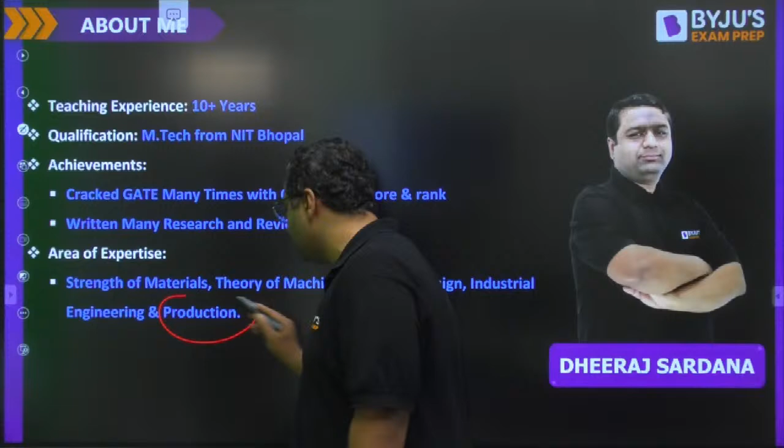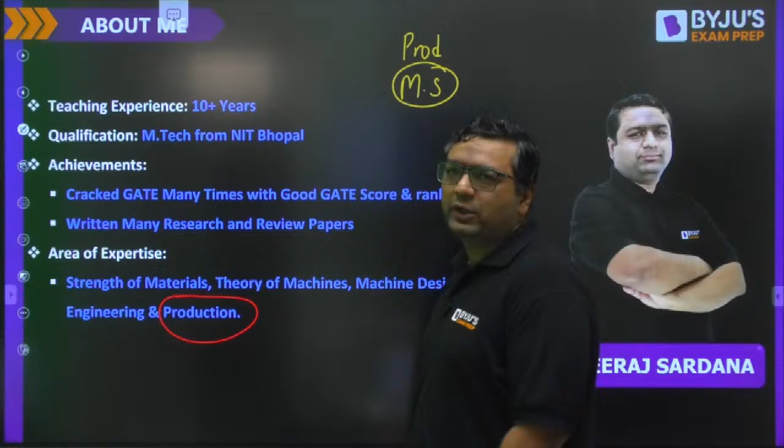So, guys, this is some detail about me, and today's subject is related to production. I already told you that whenever you see the production part in ISRO, major questions are coming from material science, okay? And in production, you will find one question from all the areas. So, we are going to continue from this.

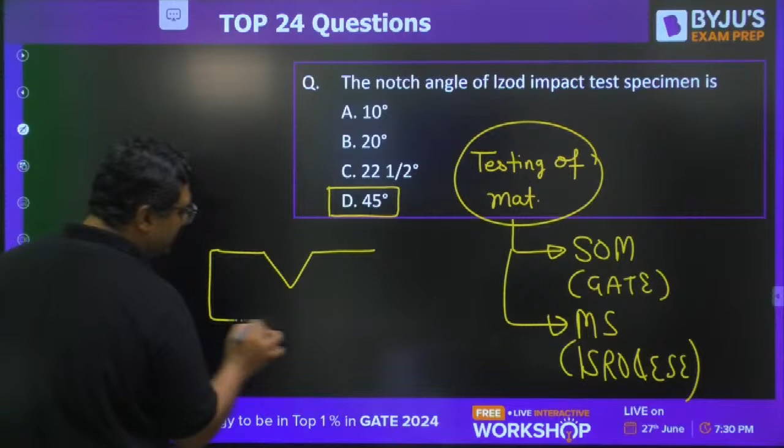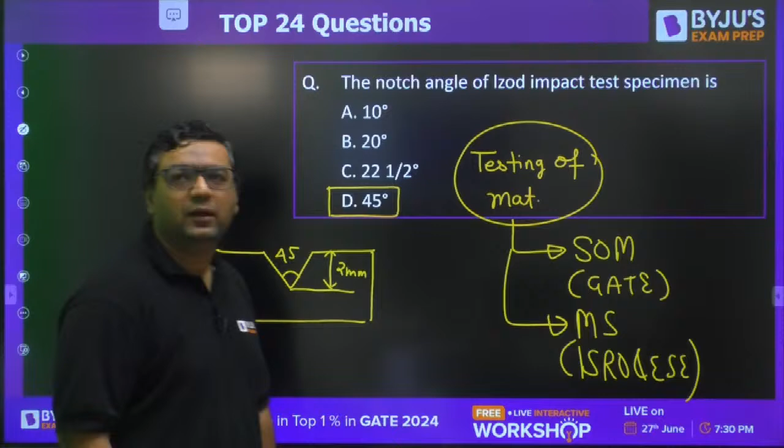Pagelward is saying the answer to be B. So I would like to say, dear, the answer is wrong. Actually, 45 degrees is the correct answer. When you are talking about the Izod impact test, then you are using this kind of specimen. This angle is 45 degree and this is 2 mm. Okay, so this is the dimension of that. So answer would be, yes, Shashank, hi dear. So answer will be 45 degree. Very good, guys. Wonderful. Moving to the next question, guys.

So dear, I would like to say, machinability does not depend upon the tool life. What is machinability actually? It is the ability to get machined. Like if we have a component and if it is easy to machine the component, then we will be calling that, yes, it is a good machinable component. Its machinability is very good. So my dear, for that, if we have a hard workpiece, it will be difficult to machine. Soft workpiece would be easier to machine. So hardness is which property? It is a mechanical property. So obviously it depends on the mechanical properties.

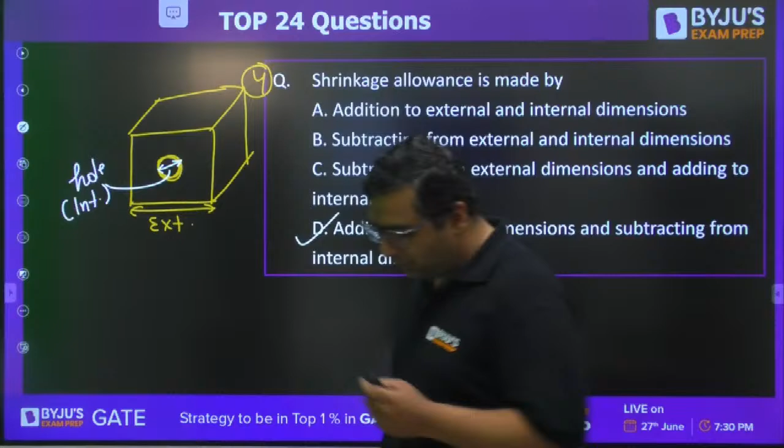Okay. So Jitin is saying D, Fajal D, Vinod D, Rajesh D. So guys, the answer for this is yes, D. Because my dear, although this type of numerical has not been asked in GATE till now, as you know, shrinkage is going to happen. So if this dimension is 100 mm, and it is given that 1 mm per 100 mm is the shrinkage allowance, then for pattern size this will be taken as 101 mm. So here we add, but in internal dimension, we are going to subtract it.

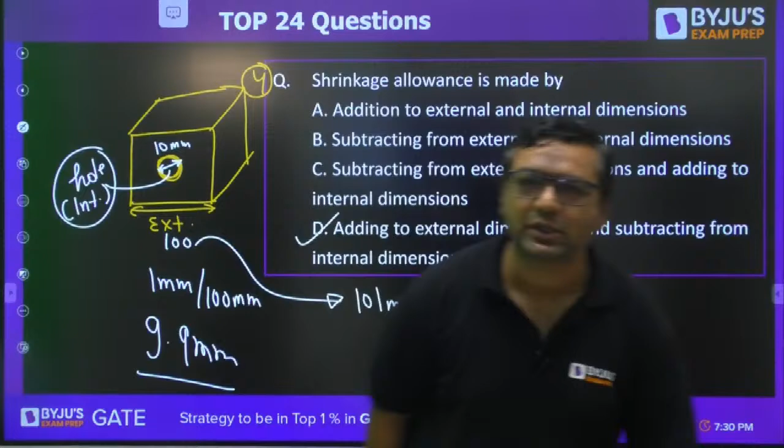So when we subtract it, it means if that hole is of 10 mm, then you would be taking it as 9.9 mm. Is it clear? 1 mm from 100 mm, so 0.1 mm from 10 mm. So here we will be subtracting it. D is the right answer for this. Very good. Moving further to question number 5, my dear.

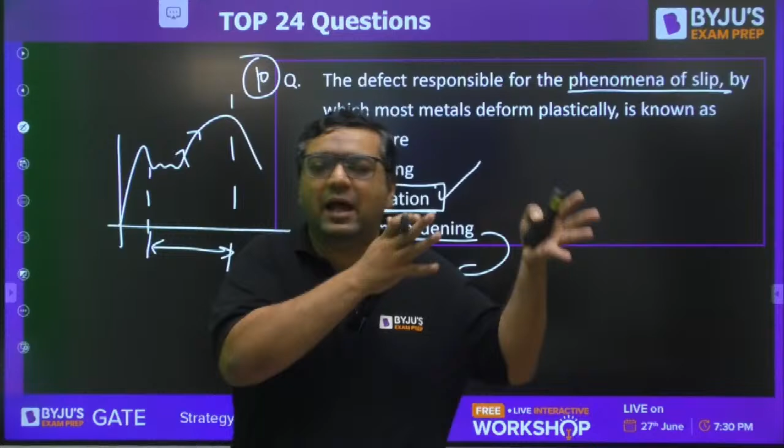But dislocation movement is something which is responsible for the phenomena of slip. Okay. Dislocation means the group of atoms which are leaving their positions, they will be moving along, and that movement is said to be slip. Okay. Strain hardening means increase of strength.

Now we are moving to question number 11. This is a numerical from metal forming.

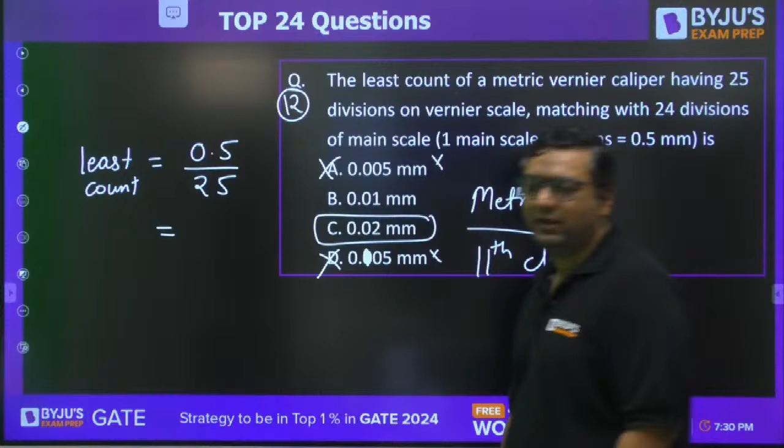What will be the answer? It will be C, na? How D? It will be C. I already said A and D are not the answers. C is the right answer. 0.5 by 25. Okay, so if you see the ISRO paper, every year they have asked one question from vernier caliper. So you need to understand the least count and all for the vernier caliper. So the answer for this question will be C. C is correct.

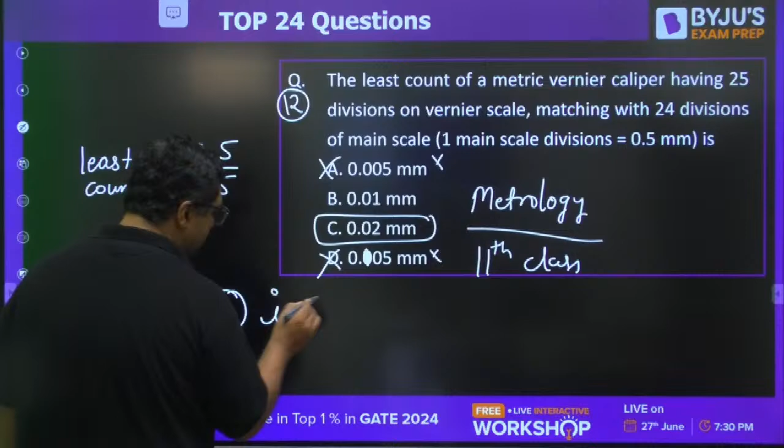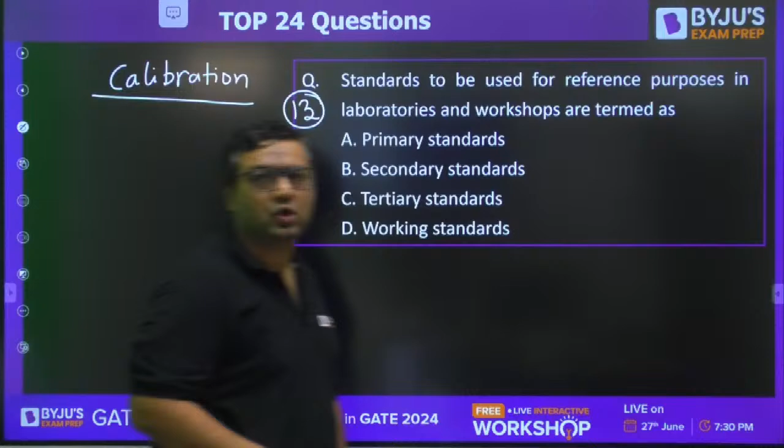Moving to question number 13. This is from calibration. I don't know whether you are aware of this thing or not. That's why I am telling you. Questions have been framed from this topic a large number of times. My dear, have you ever seen that whenever you go to a Kiryana shop, there is a weighing machine? Previously, we had some weights and we were using taraju kind of things. But nowadays, you are having digital machines.

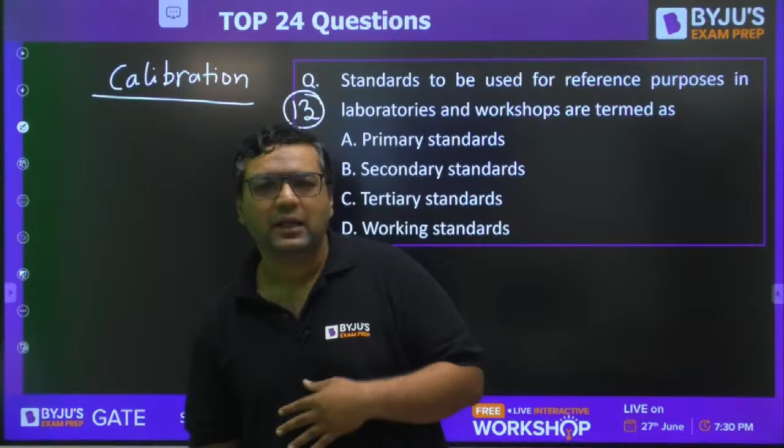And with that digital machine, if it is not showing 0, he goes for some on-off button and you have 0 on the digital scale. You must have seen that. But my dear, what is calibration? Previously, what was happening actually, as you know, the units like 1 kg, 1 meter, they have been defined by some standards.

Like they have taken some standard length and they call this 1 meter. So when they have defined those things, they are standardly defined and those standard lengths are still there. They are kept at some position, you know that, everyone.

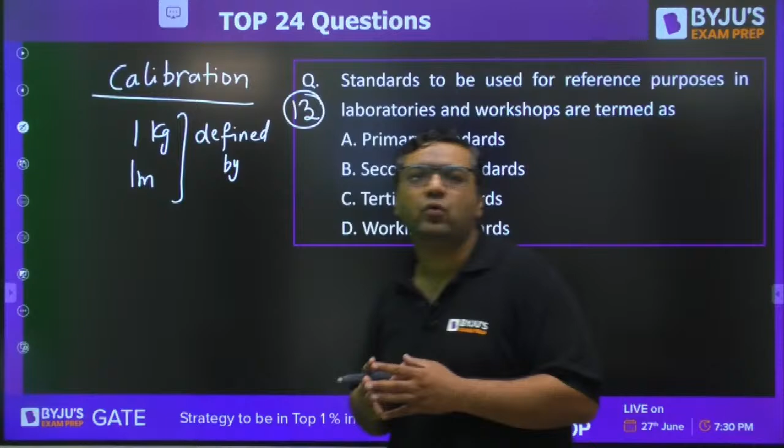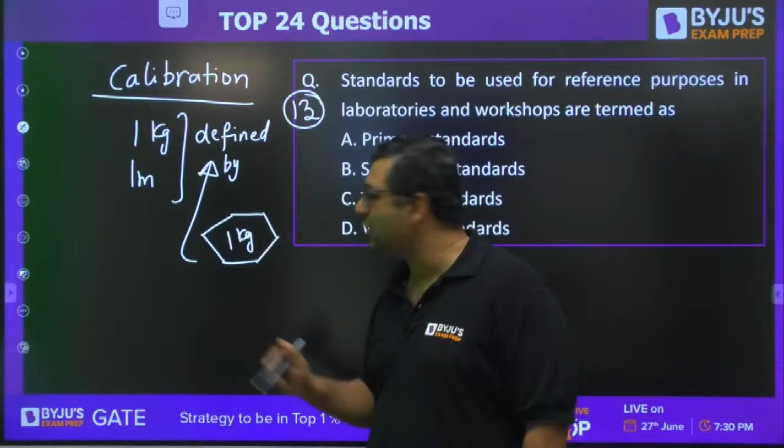So my dear, when calibrations are done, let us say we are going to make some weight which is used for measuring purposes. Like you have made this stone for 1 kg. So my dear, whether this load is 1 kg or not, for that you have calibrated it with the original piece which is defined as 1 kg. So when you calibrate, you will be equating it with this. And if that calibration shows that yes, it is equal, then this calibration is said to be primary calibration, because you are directly matching with the original piece.

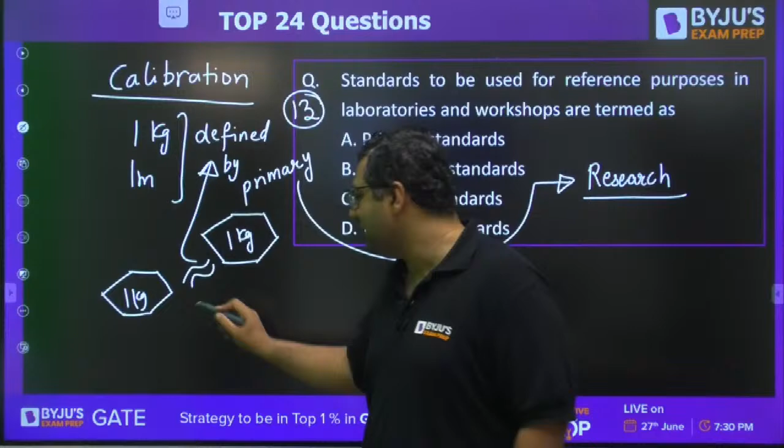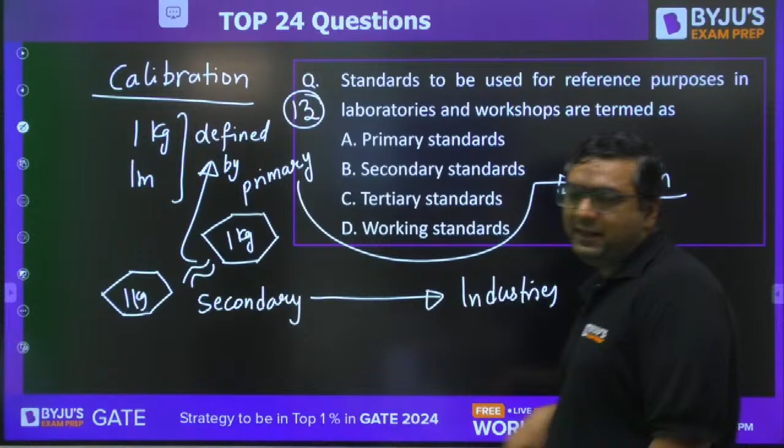Primary calibrated components or devices or weights are used by research organizations because their accuracy matters a lot. Then my dear, if you have made one more 1 kg weight, and to check whether it is 1 kg or not, you have equated it with the primary calibrated one and found it equal, then this calibration is said to be secondary calibration. Secondary calibrated components are used in industries. And after that, if you calibrate some weight with this secondary calibrated thing, that is said to be tertiary calibration.

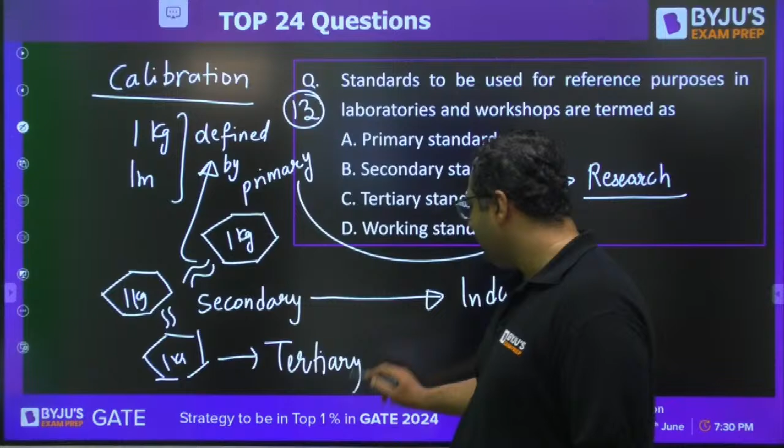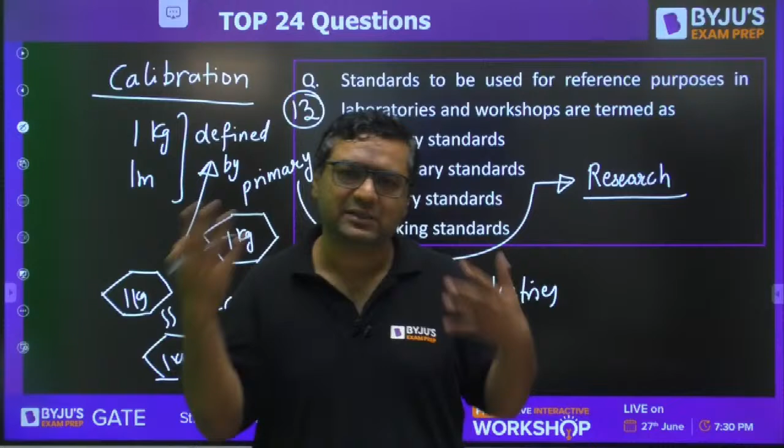That is used for general purposes where we don't have that much requirement, where some errors are okay to have. Like I already told you an example with thermometers. Some are primary calibrated, some secondary calibrated. Obviously for research and R&D purposes, big organizations like NASA and ISRO would definitely be using primary calibrated. Good industries which are also doing internal research will be using secondary. And in your school labs and college labs, you are using tertiary calibration.

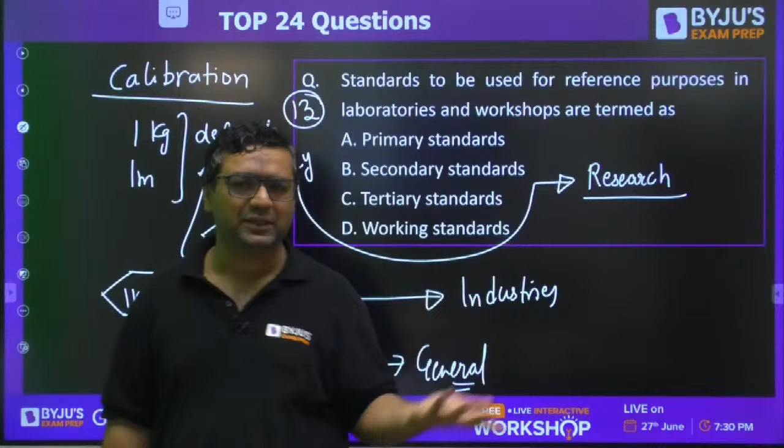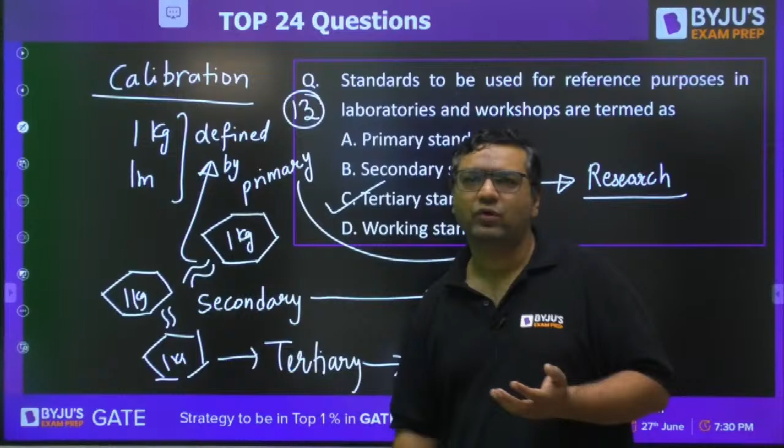So the answer for this question will be, my dear, tertiary calibrated. Because in the laboratory and workshop we don't need that much accuracy, so we go with tertiary calibrations. Okay. Everybody understood this? This was something new I wanted to tell you.

Moving further, my dear, question number 14. This is saying, for achieving a specific surface finish in single point turning, the most important factor to be controlled. You must be aware that maximum surface roughness is given as F squared upon 8R. It is also given as F upon tan CS plus cot CE. I feel from these formulas you can answer this question very easily.

Yes. You have not seen any such formula with respect to depth of cut, cutting speed, or rake angle. You have seen it with respect to feed. So the answer for this question is going to be C. Okay, this is question number 14. Guys, 10 questions are still left. Question number 15 in front of you. This is once again from metrology.

Interchangeability can be achieved by standardization, better process planning, simplification, or better product planning. Yes. Pagel is saying A, standardization. Abhishek, A. Vinod, A. Okay, very good. So guys, the answer is A.

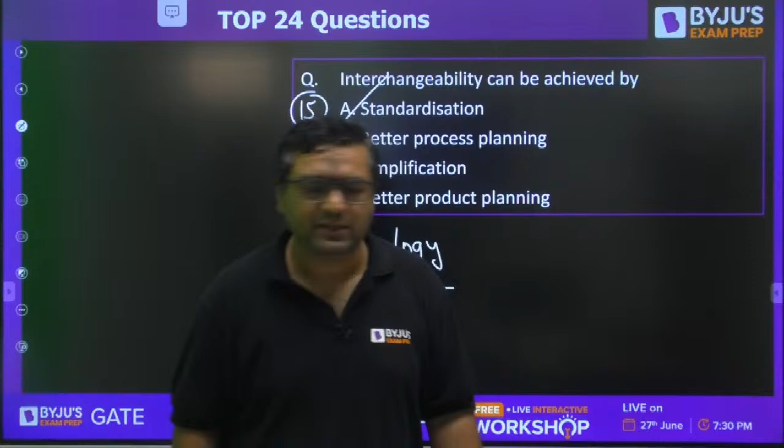Moving further to question number 16, guys. This is a very famous question asked in both GATE and ESE. What do you feel the answer will be? Cutting speed, depth of cut, feed rate, which is going to be more influential for tool life? Yes. The most important, I feel, is the speed.

After that we have feed. Then we have depth of cut. When you will see the equation V T^n f^x d^y, you will find always x should be more than y. And this one is more than x and y. So the answer for this will be what? Answer for this will be 3, 1, 2. D would be the right answer for question number 16. Very good, Abhi. Wonderful, guys.

Moving further to question number 17. This is the proper numerical on shaper and planer. They have given you the forward or cutting speed as 9 meter per minute. Then, my dear, they are saying lambda is 0.5, 1 by 2. Feed rate 0.3 mm per stroke. Clearance at each end. So length of cut will be, total length is given as how much? 700. So it will be clearance plus 700 plus clearance. It would be 750 mm.

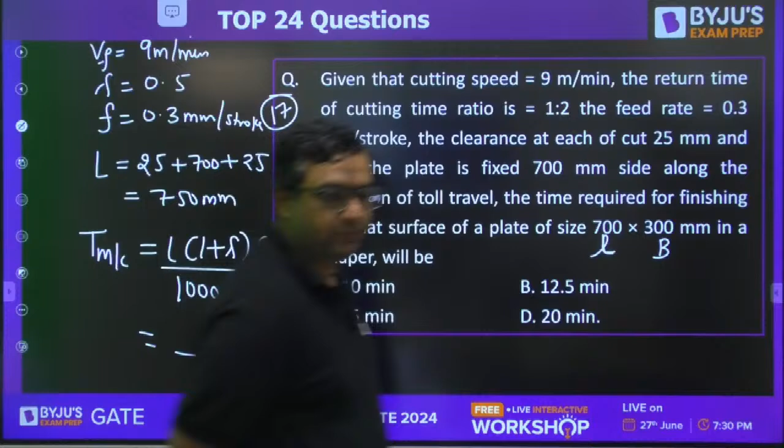What would be the answer, guys? This is L, this is B. Solve it and get the answer. Question number 17, we are left with 7 more questions still. Formulas are in front of you. This is lambda actually. Anybody? Solve it. Yes. Pejal, Vinod, Abhi. Anybody? Yes, put the value, get the answer.

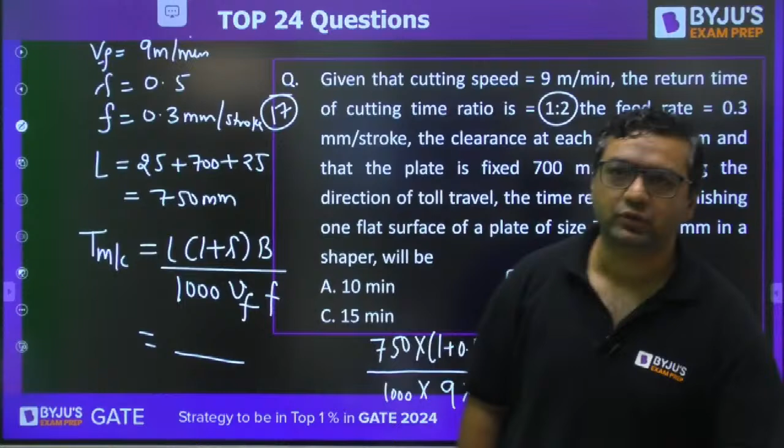Shall I do the calculation? 750. It is 12.5. B would be the right answer. 12.5. Putting all the values, you will get this. This was mm, this was mm, this was meter per minute. That is why we multiplied it with 1000. Everybody got it?

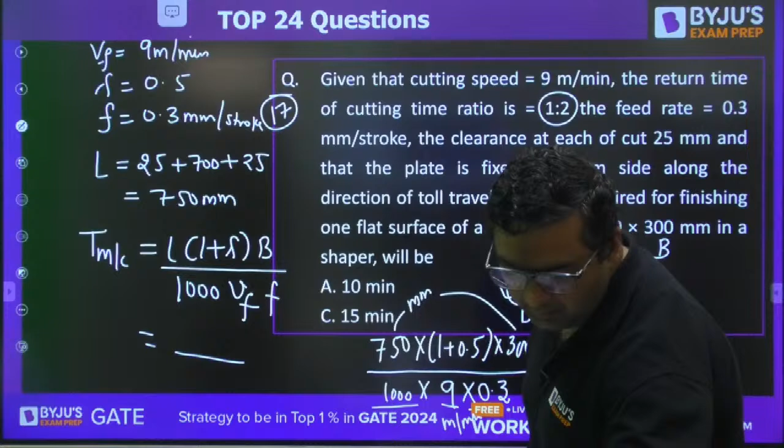Arey bhai, nobody is answering. Yes. Pejal, Abhi, have you done it or not? I am unable to see the comment.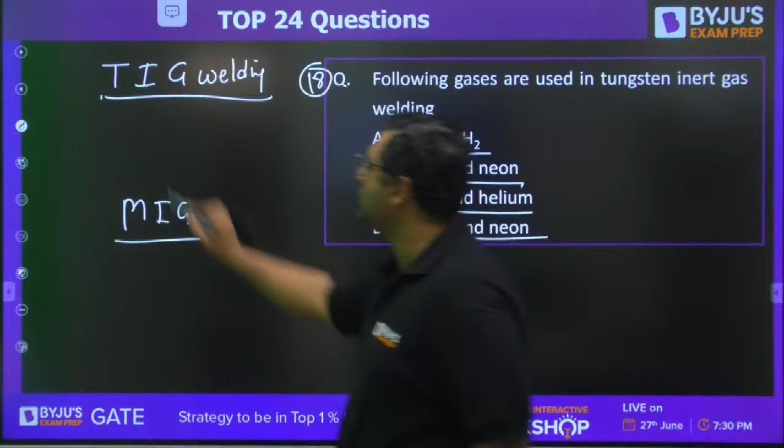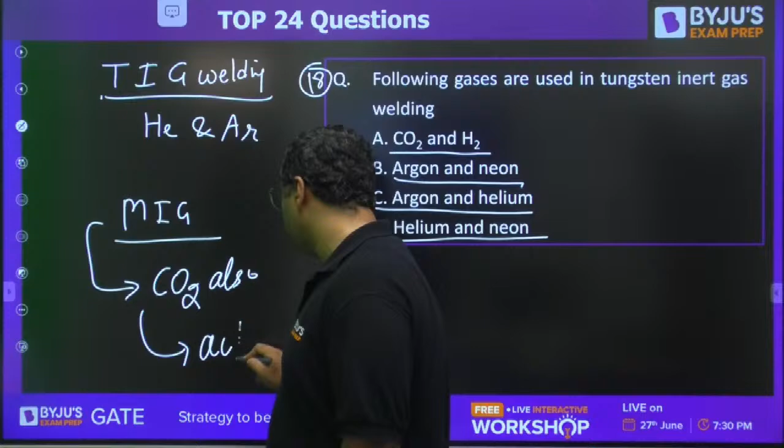It was question number 17. Moving to question number 18. This is from TIG welding process. Which gases are used in TIG? CO2, H2, argon, neon, helium. In TIG, if you remember, for TIG and MIG we discussed separately. Yes, for TIG we use helium and argon. And for MIG we have a choice of CO2 also. And when we use CO2, it is said to be active gas, metal active gas welding process. So answer will be C for this, argon and helium.

Question number 19. The force required to punch a 25 mm hole in a mild steel plate 10 mm thick, where ultimate shear stress of the plate is this, nearly. I feel you know that force will be tau ultimate into pi d t. This type of question is asked in GATE also, ISRO also. What would be the answer for this? Question number 19. We have 5 more questions after this. Surya is saying B.

What about others? Abhi, Vinod, Pejal? Answer will be coming out to be B. Yes, it is correct. Mind it that this time in ISRO, written has a weightage of 50%. Previously written was not having any weightage. So that's why written is becoming more important this time.

Moving to question number 20, guys. Very good, Jitin and Abhi. The machining process in which the workpiece is dissolved in the electrolyte solution: electrochemical machining, ultrasonic machining, electro discharge machining, or laser machining. This is a non-traditional machining method. Okay. Yes, Surya, Pejal.

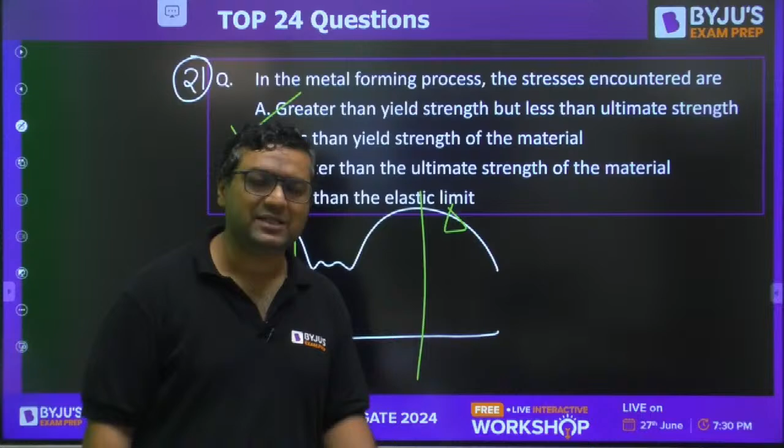It is greater than yield strength but less than ultimate strength. Because after ultimate strength, we have a fracture. So in metal forming, we do not go for fracture. Answer will be A for it. Wonderful, guys. Very good, Jitin, Surya. Moving to question number 22.

The blank size of a gear with 3 mm module and 40 number of teeth is? Okay. What will be the answer for this?

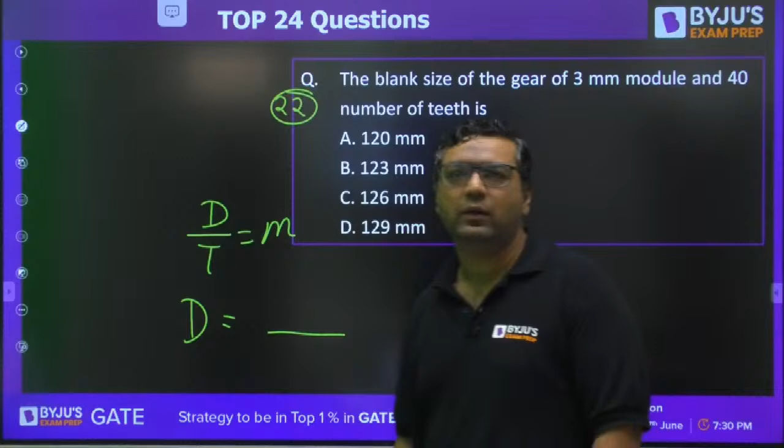Pejal, I will be coming up for that separately. Okay, actually one session has been over also, and I'll be coming up with one more session. Okay, because in the next series we will start from SOM only.

Answer will be C for this. Question number 23, guys. After that, one more question. What would be the answer for this? We have just discussed about this. This is electron beam machining, electrochemical machining, electro-discharge machining. I feel everybody is aware.

We have just seen ECM will be electrolyte. So just by this you can say C and D are out of the race. Either A or B will be the answer. Kerosene is a dielectric. So B with 1. A will be the answer. And ultrasonic machining uses the abrasive particles. Electron beam machining will use the vacuum. A is the right answer.

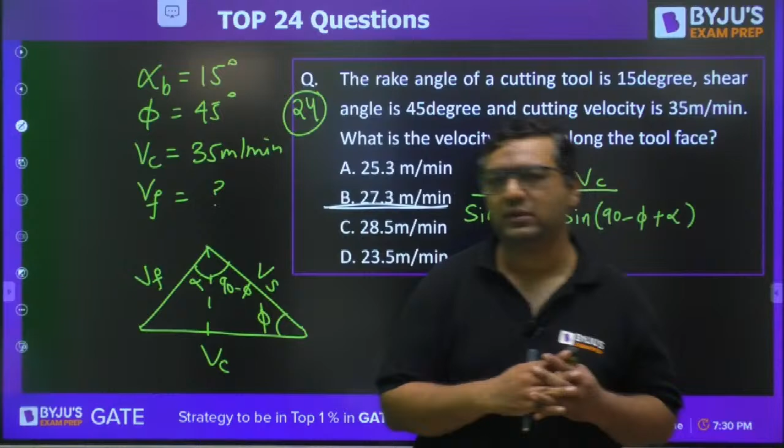Yes. So answer will be, are we getting? B or C? Okay, are we getting B? Everybody is getting B. Okay, fine then. Okay, guys. So with this, we have completed today's 24 questions.